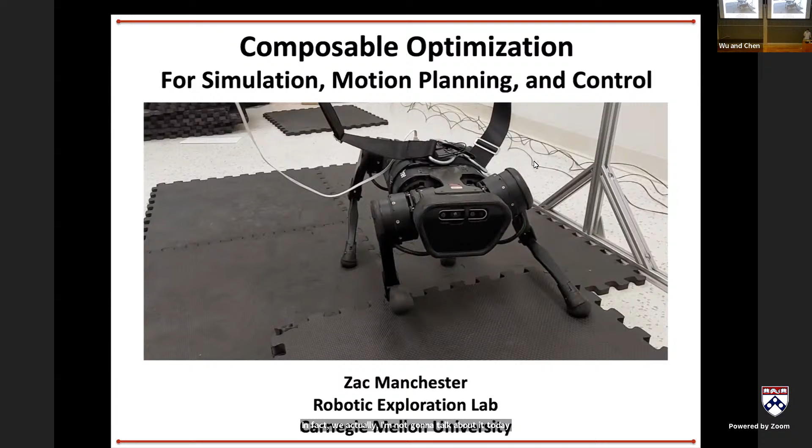As Michael mentioned, I have had a long-running interest in space things and still do. In fact, I'm not going to talk about it today, unfortunately, but we have 4 satellites on orbit from my lab right now doing kind of crazy multi-agent formation flying things. I'm happy to talk about that later if you want to, but just to bring it back, as a space nerd, this is one of my favorite robots, right?

This is Mars Curiosity. This thing is kind of incredible. It's been on the surface of Mars for 11 years now, which is wild, and still operating in one of the harshest environments imaginable. And in that time it has covered 31 kilometers, which sounds really impressive until you divide those two numbers and realize that's about 7.7 meters per day. So from here to the other side of this room maybe is about all the distance this thing covers in a single day. And the reason for this is actually that this thing is pretty much not autonomous.

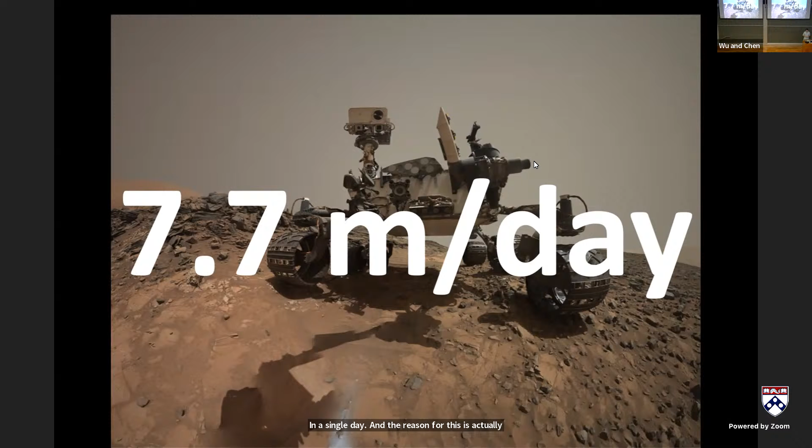There's some amount of autonomous driving these guys do, but for the most part, the way this thing is driven - does anyone know what this is? This is the famous Mars yard at JPL, where I've been lucky enough to visit a couple times. So what's going on here?

They have basically a mock-up of the rover in a big sandbox with a bunch of rocks and things around. To figure out how to drive this thing, there are human drivers that go in this giant sandbox and move the sand and rocks around to recreate the scene as best they can around the rover on Mars. Then they painstakingly plan and drive around these things to figure out how to drive in the given scenario on Mars, and basically uplink these commands, and the rover executes it. So it's a painstaking human-in-the-loop situation anytime they come across anything tricky. As a result, you're ultimately not able to cover as much ground, get as much science done, et cetera.

Meanwhile in robotics, we're all familiar with seeing really impressive feats on legged robots. But for me, this is still the bar, and we're still not quite here. What we'd love for these systems to do on Mars, say, is to operate with the level of agility and robustness as these guys are able to, on super rough terrain, reasoning about full body dynamics, rich contact interactions with the environment, all that kind of good stuff.

All right, so how are we going to do this? I guess this talk has three parts. It's a bit of my philosophy on this whole thing, so bear with me a bit.

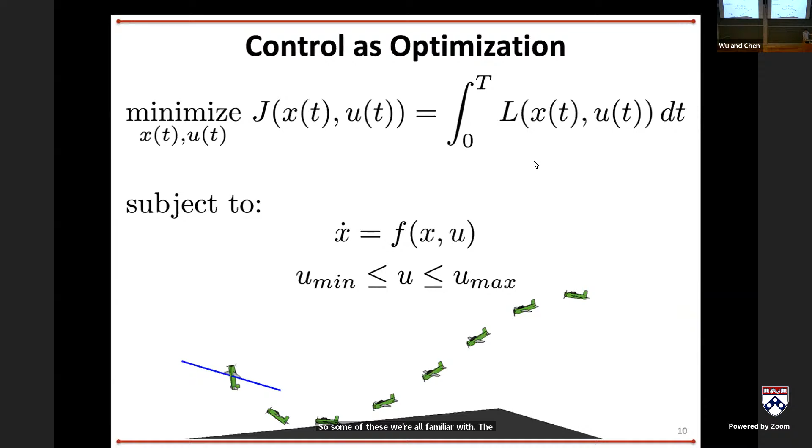So some of these we're all familiar with. The first one being control - optimal control, reinforcement learning. The gist of these things is maybe you have a model, maybe you don't if you're doing model-free RL, but you have some model of your robot, maybe with things like F equals ma and torque limits. You have some kind of objective function, cost function, reward function - depending on if you're a learning person or a control person - that you're trying to maximize or minimize, which encodes the behavior you want: minimize effort, get to some goal, minimize time, whatever that might be. Generally speaking, we can discretize this and throw it at a computer in a bunch of different ways and hopefully get an answer out.

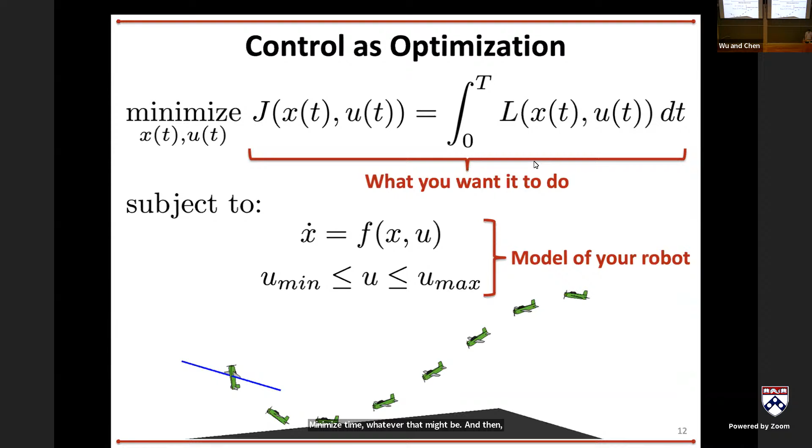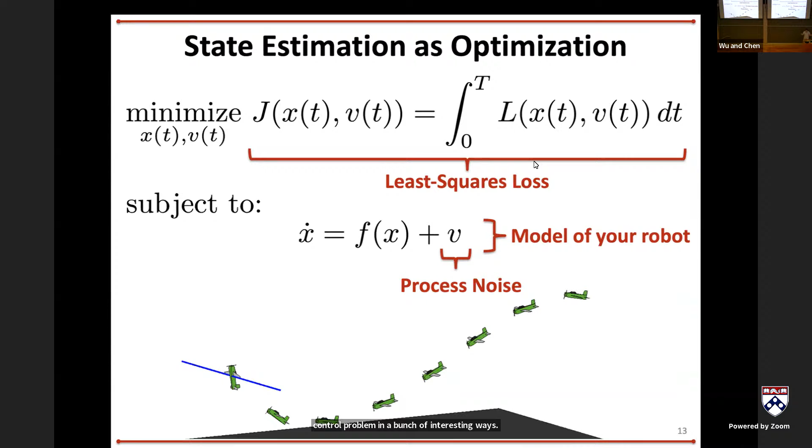Almost identically, we're probably all familiar with the fact that state estimation can be posed as an optimization problem. As a fun aside, it's actually equivalent to an optimal control problem in a bunch of interesting ways. Similar deal - we can solve this optimization problem and figure out where we are, given measurements and a model.

Maybe a little bit farther afield and less familiar to us in robotics is that you can also pose physics as optimization. This is the classic least action principle. Usually we encounter this somewhere in undergraduate physics, and it's usually this weird thing involving calculus of variations that we'd rather forget. Somewhere in there you end up with the Euler-Lagrange equations, and then life is good, and we kind of use some package to just give us the manipulator dynamics.

But I think there is actually a lot of value in going back up to this slightly more abstract optimization formulation. If you take this a little bit more seriously, there are some particularly useful properties for us in robotics here. Rather than doing the crazy calculus of variations and getting your Euler-Lagrange equations, instead look at this and try to directly minimize it. The L in there is the Lagrangian, and this is the posed trajectory, and you minimize this thing over time.

If you stare at this and think about it for a second, this looks exactly like that optimal control problem, just with some letters changed around. If you take that seriously and use the kind of methods we use to solve optimal control problems on a computer - namely, we just discretize this thing and minimize it explicitly as a numerical optimization problem - you can get physics this way too.

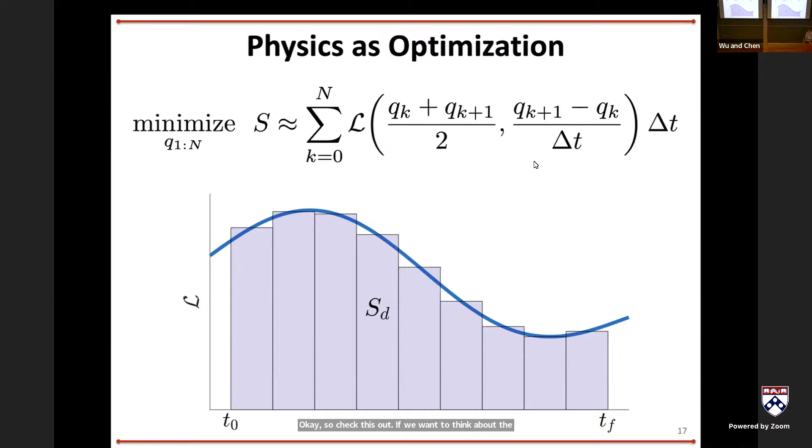Okay, so check this out. If we want to think about the environment now, the reason to do it this way is now I have this numerical optimization problem. I can throw inequality constraints in there, and it's no big deal. And we have great solver tools for doing this.

In particular, if I want to think about impacts, which historically are these nasty, non-differentiable, stiff things that are hard to simulate, well if I take this perspective, all I need to do is throw an inequality constraint on there that says, for example, the height of this brick has to be greater than or equal to 0. If I do this and take that discretized least action problem and just solve it with any solver you want, out pops impact dynamics for free. There's no kind of numerical badness. And it does the things you expect.

Basically, if I put that constraint in there with a Lagrange multiplier, the Lagrange multiplier ends up pretty much being the contact force, the impact force, normal force, whatever. And you can do a bunch of cool things with this. So maybe it's a good idea to go up a level and think about our physics in this kind of optimization way too.

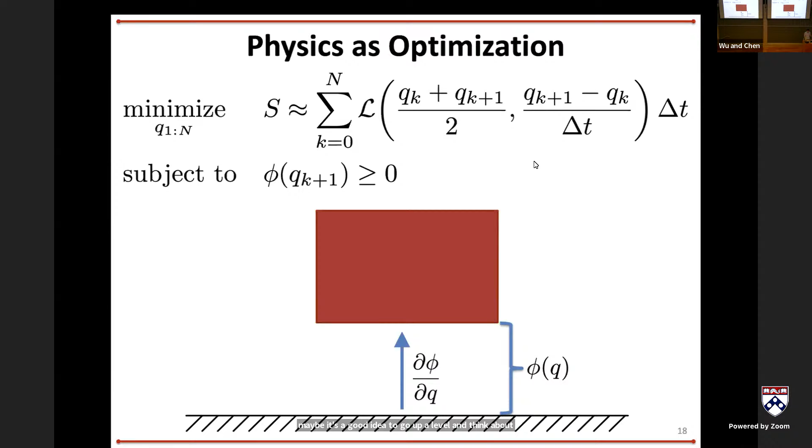So this is a nice optimization problem. We can solve this. We get all the stick-slip nastiness that tends to mess us up and gets approximated in all these simulators we're used to using. This just gives you the answer, and it's a convex optimization problem. So why is this so hard?

And the last one I'll talk about, which is actually recent-ish work out of our lab that I'm particularly proud of and I think is kind of cool: collision detection is also maybe a good idea to pose as an optimization problem.

So you can kind of wave your hands and imagine if I'm looking for the closest point between two convex objects, I can pose that, distance is a convex function, right? Some kind of norm. If they're convex shapes, I can write this down as a convex optimization problem to find the closest point and the distance between the two objects. There's some details in there I'm going to skip for now, but there's a paper on it. It's kind of cool, and yeah, we can do this as an optimization thing too.

So what we've kind of gotten to here is: we've got physics, we've got collision detection, we've got state estimation, and we've got control. All of these are optimization problems at some level. And kind of the key question now, which is part 2 of the talk, is how do we put these things together and assemble them?

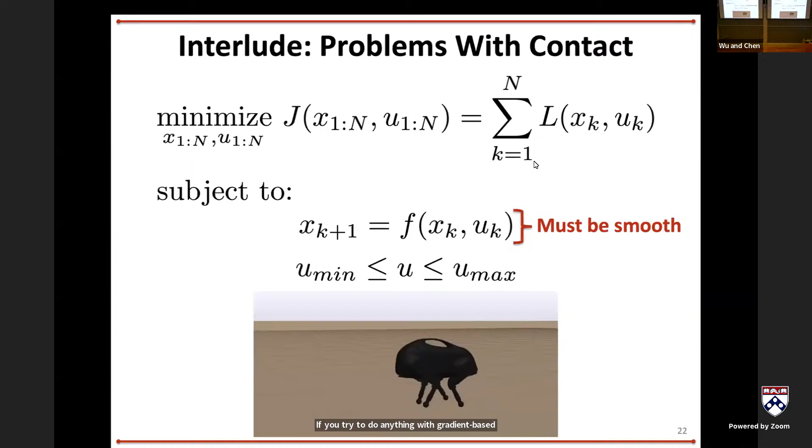These are all non-differentiable things. And you can try to approximate these in various ways, but you end up with generally bad numerical things happening due to this non-differentiability if you try to do anything with gradient-based optimization here, right? And so in particular, that dynamics function there for this robot, if you're not doing some sort of relaxation, whatever, is non-smooth, the gradients are kind of bad in various ways, and it makes doing gradient-based optimization really hard.

That said, right, we're all used to seeing robots do pretty impressive things. So how does this get done?

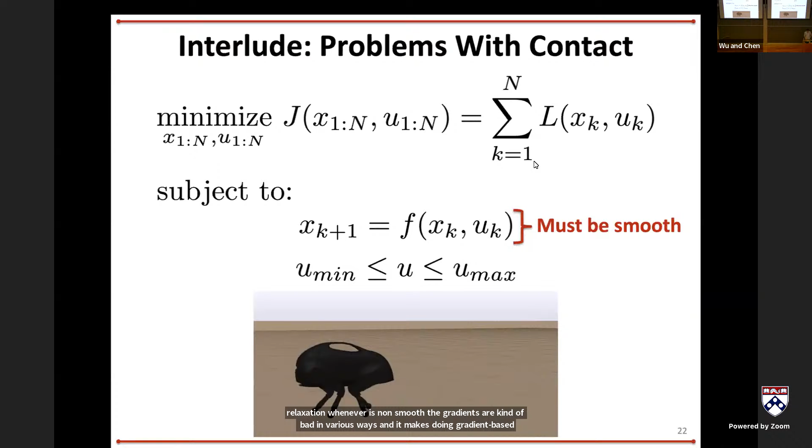Practically speaking, most of the robots out there today are doing some kind of hybrid approach. What this means is if you can look at this problem and pre-specify the contact, what's called the mode sequence. For example, for a legged robot, it's the ordering in which the feet touch down and lift off, basically the gait. If you can pre-specify when those mode switches are going to happen, you can essentially remove those nasty non-differentiable switching events from the optimization problem entirely. You pre-specify them, and then you're just optimizing over nice smooth arcs in between, and we're back to stuff we know how to deal with.

So this is pretty standard. You can use standard tooling. We can solve this in ways that are fast and accurate. The problem is we need this contact mode pre-specification.

In a lot of cases, you can do this reasonably, particularly in a lot of locomotion contexts where you can just pick a gait, especially for a biped - it's like left, right, left, right. There's not too much to do there. Even for a quadruped, there's a handful of gaits you might want to do, and there's lots of good heuristics for doing this. So you can get pretty far with this.

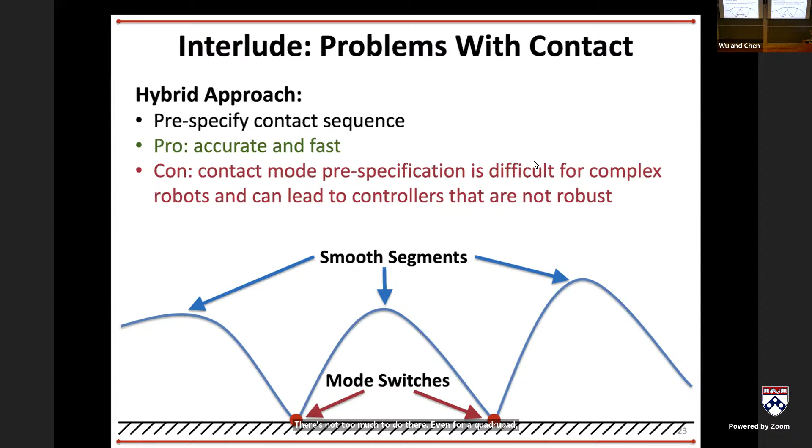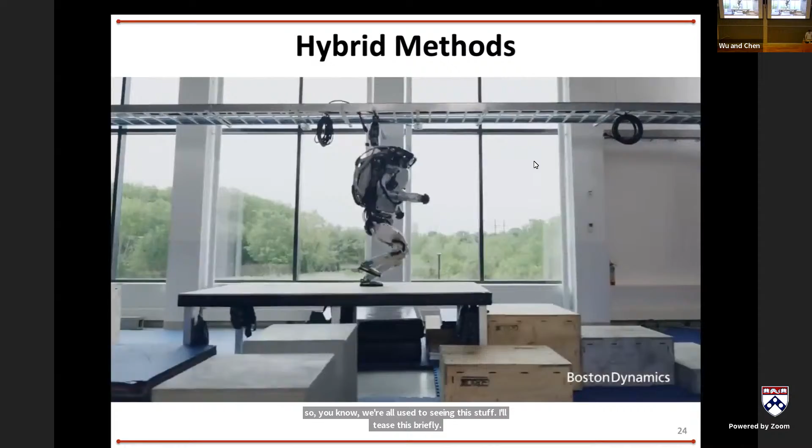And so we're all used to seeing this stuff. I'll tease this briefly - this is really impressive. This is all done with these hybrid ideas. But there's some issues, even in this context, with these ideas.

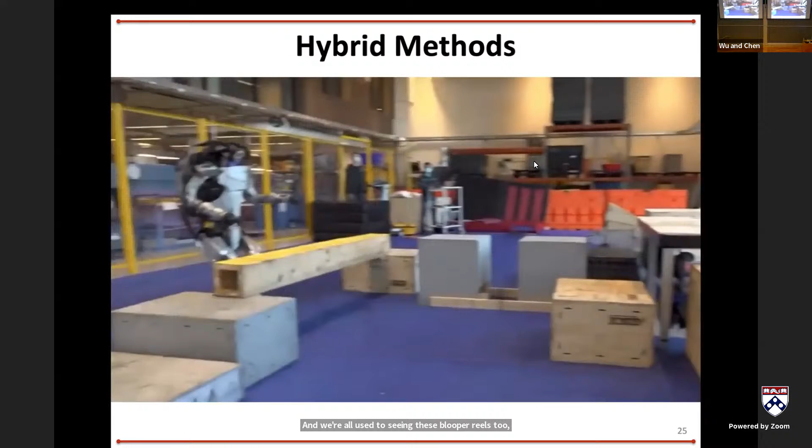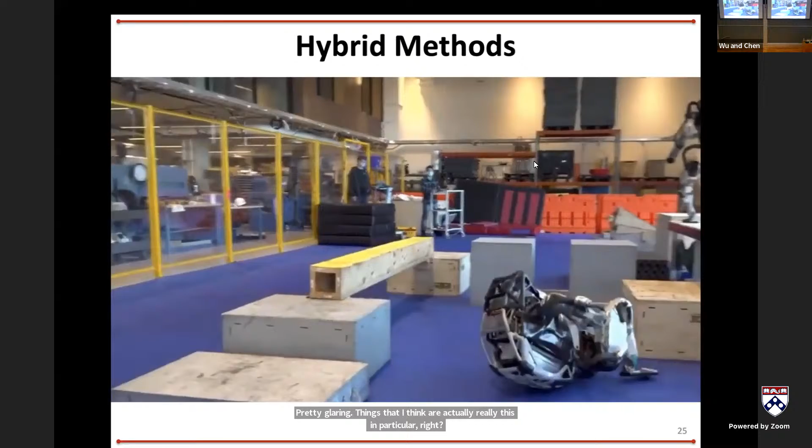And we're all used to seeing these blooper reels too, which, to their great credit, Boston Dynamics puts these things out. But if you look critically at these, there's some pretty glaring things, in particular right here. So what happened there? Basically, the robot's trying to jump over this beam, and it's making contact with its hand. But then in the middle of the maneuver, it grazes its foot and then fails.

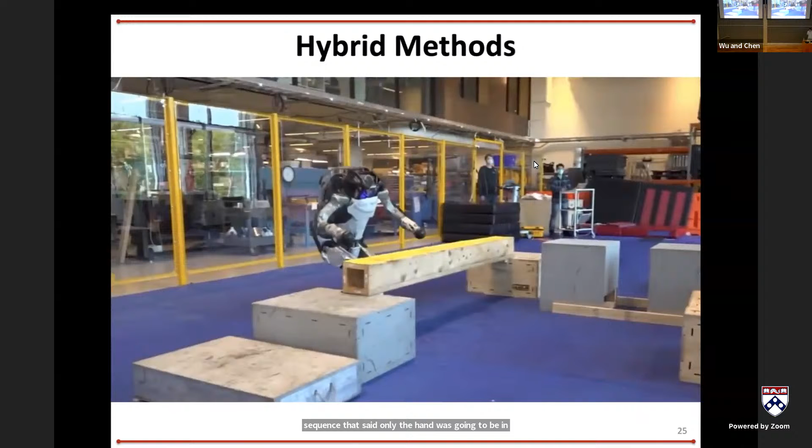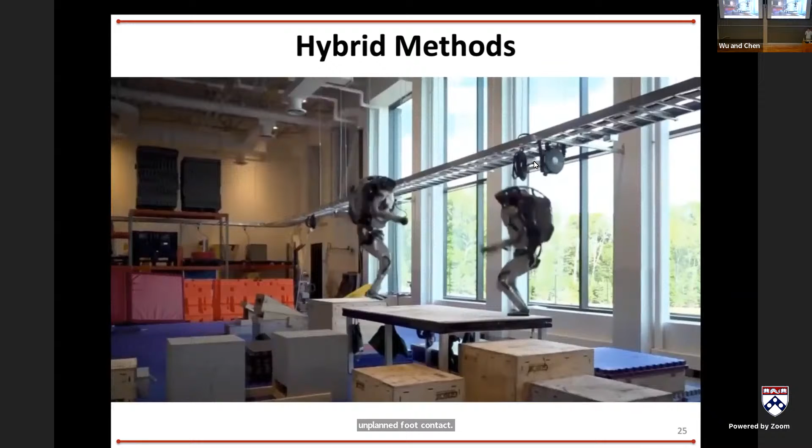And the reason it failed is that it was relying on this pre-specified contact mode sequence that said only the hand was going to be in contact with the environment. And the controller, as a result, didn't have any way of reasoning about the contact forces made by that unplanned foot contact. Said another way, the controller is essentially open loop on the contact modes - it cannot reason about unplanned contact switches.

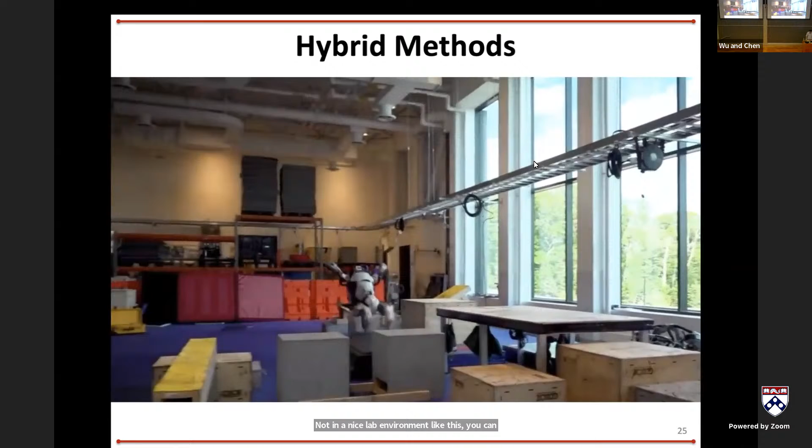And so this makes these things kind of, in some sense, inherently brittle. You can imagine putting these things out into the wild, not in a nice lab environment like this, and you can get into serious trouble. So there's this open loop nature to the contact modes that we'd like to try to make our controllers reason about more fully.

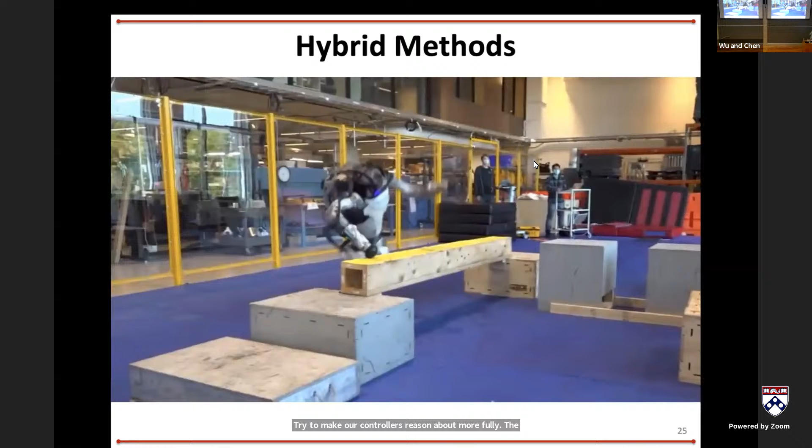The other scenario in which these things tend to break down is when you have lots and lots of possible contact modes that you have to reason over, which can happen pretty quickly in manipulation tasks where you might be doing in-hand manipulation, and you can't just talk about a handful of a finite number of contact points anymore. It's like a continuum. If you tried to discretize it, it'd be very high dimensional, and you'd end up with combinatorial badness trying to figure that out with a hybrid method.

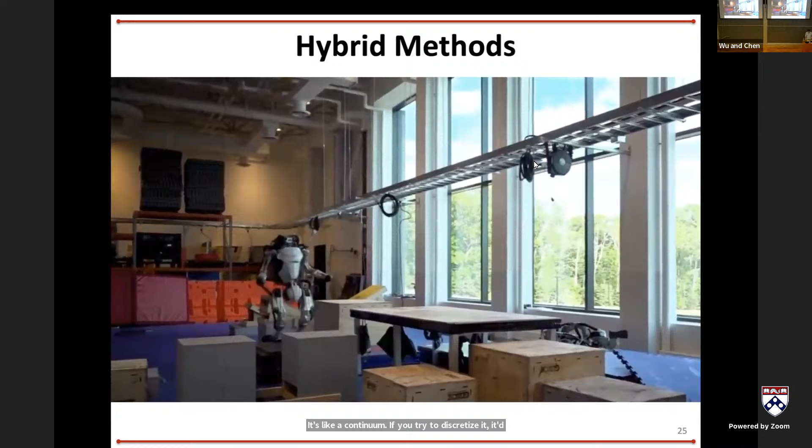So that's the hybrid story. What we're going to try to do is this second thing here - contact implicit is what this tends to be called. Michael here has done lots of this and kind of pioneered this in some ways as a PhD student. The idea here is what we really would like to do is optimize over not just the state and input trajectory of the robot, but also these contact forces, and let the algorithm fully reason about the ability for the robot to make and break contact with its environment and deal with unplanned contacts and actually plan these contacts itself.

So far, though, most of the methods that have tried to address this either make a ton of approximations, basically smoothing approximations for these contact physics to make the derivatives nice, or if they try to really deal with the true nature of these discontinuous stiff contact things, they tend to have serious numerical difficulties or combinatorial blow up in some way. Okay, so that's what we're after.

So what I'm going to do now is tell you how we're going to try to take all these pieces, which we, in principle, each have a nice optimization algorithm for, and stitch them all together in this kind of weird coupled diagram.

Yes, please. No, it's great.

Yeah, I think we can do it. There's nothing stopping you from doing it. I mean, there's the Rayleigh dissipation function, right? You can state friction in a variational way. It's sort of all optimization, right? So it comes down to this like...

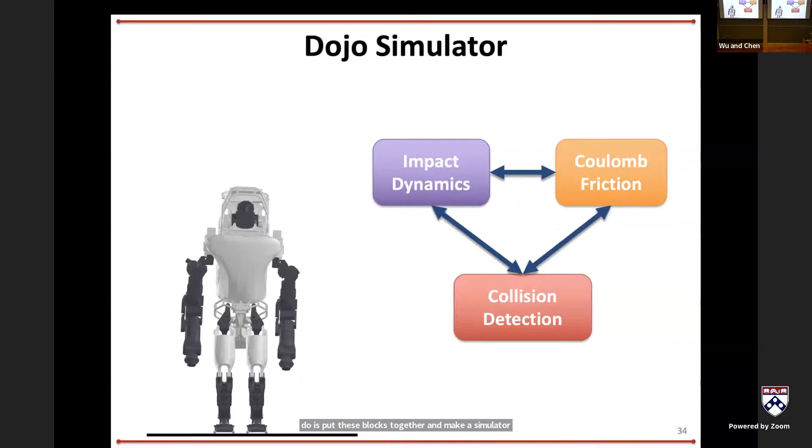The first is that you can do true hard contact simulation. If you're familiar with other simulators like MuJoCo, these often have weird artifacts - in particular, they have interpenetration, say, where the feet sink into the floor. They also have creep, which means because stick-slip is inherently non-smooth, if you do any kind of smoothing, you can't actually do sticking friction. So in MuJoCo or many of these other simulators, you always get creep - stuff slightly sliding downhill - and you can't get true static, sticking friction, which is annoying.

I mentioned briefly, and I'm not going to go into it, this kind of variational perspective where you're minimizing that action integral. These methods in conservative settings give you energy and momentum conservation basically to machine precision, which is very cool - they have these nice long-term stability properties. They obviously don't conserve energy in this impact friction setting because it's not conservative, but the point is they give you good long-term stability, which is really nice.

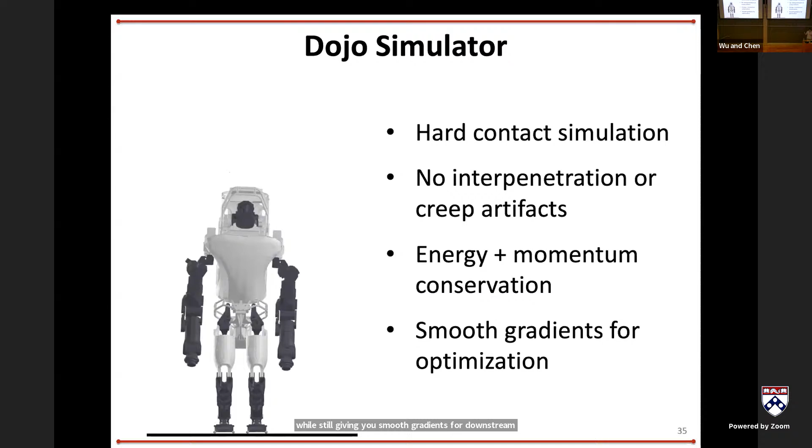And then finally, we can do all of this while still giving you smooth gradients for downstream optimization, which sounds weird, like getting your cake and eating it too. But there's a key trick we're playing. I mentioned this rho parameter, this central path parameter that's smoothing things out and lets us take gradients and lets us do Newton's method.

Yes, we are. So what I'm doing is basically caching the last 3 or 4 iterates of the interior point method. I'm giving you x from the final converged answer, but I'm giving you the derivative from one of the previous iterates that was smoothed out before I pushed rho all the way down and converged all the way. Does that make sense?

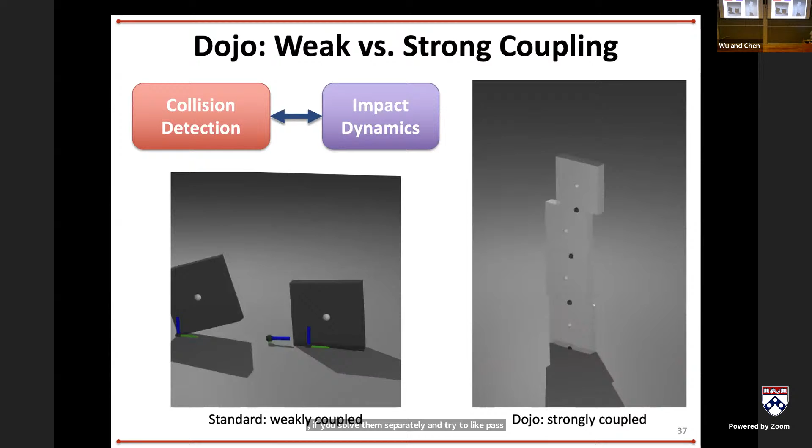The KKT conditions for this are some kind of variational inequality. You could also call this a mathematical program with complementarity constraints or equilibrium constraints, but I think that viewpoint does not result in good algorithms, because what you're trying to do there is think about it at the level of complementarity constraints, which are horrible things you don't want to deal with. I think the lesson of numerical optimization writ large is that every performant optimization algorithm finds some way of sidestepping complementarity. In interior point methods, you smooth it with a log barrier. In active set methods, you switch to avoid dealing with it. Basically every way we know to solve optimizations well is a trick for circumventing directly attacking complementarity. So pick your favorite way to do that.

Sorry, this got pretty off track. Let me try to get us back on track.

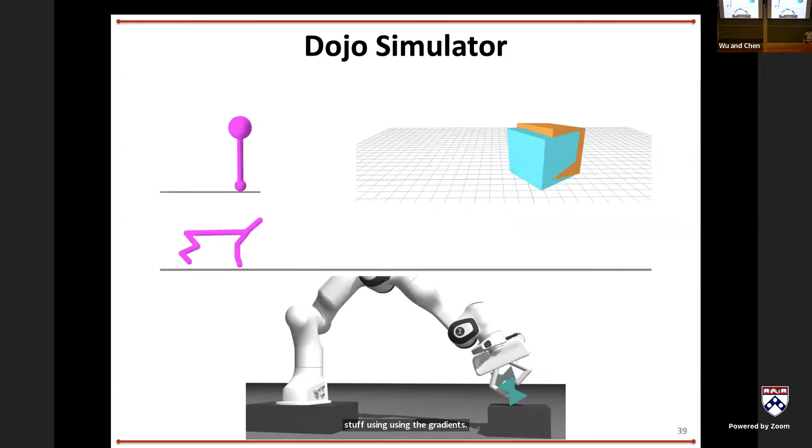To finish up here, what I really want to talk about is the stuff we've done in the lab, taking all that physics stuff and nesting it or combining it with the optimal control problem, doing the stuff shown in these videos. We went pretty deep on this. As you can imagine, these optimization problems are not easy to solve—the numerics are pretty gnarly. So we started asking what in this we could approximate while still maintaining the ability to reason about these contact interactions in a nice way.

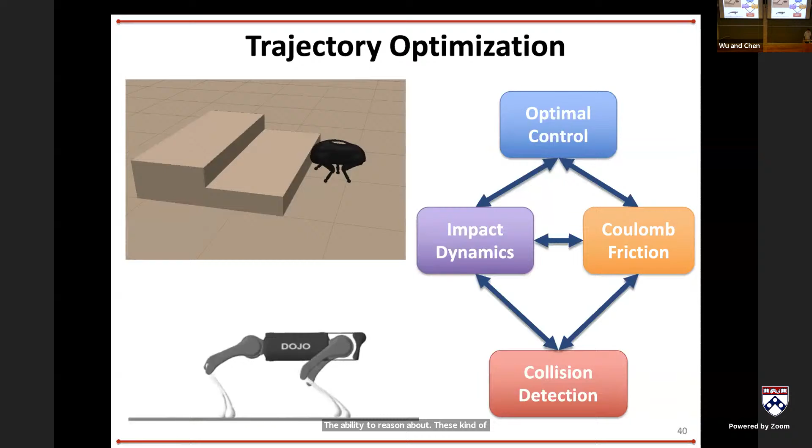So what we started doing is we want to keep the structure of this problem. We want to keep this block structure with this cross coupling, because this is what's giving us the ability to think about stick slip and impacts and all this other nice physics. So what we're going to do is keep the structure, but start approximating things in the boxes.

For this control problem, we take a reference and track it, so now we have a nice quadratic objective that's easy. Inside the dynamics, we linearize them locally about some nominal trajectory or nominal pose. We're not linearizing anything about the impact dynamics, just the manipulator dynamics. In the collision stuff, we can linearize the signed distance function about some reference pose. So we're not keeping the problem exact, but we're making the problems easier. Similarly, the friction cone we can approximate using a pyramid if you want, though that one's less critical. So you approximate stuff in the boxes, but keep the structure.

And then you can do cool things. So this is a fun little example we cooked up that we call PunchBot. It's an inverted pendulum with a little arm on top. The setup here is you linearize this thing about the upright, unstable inverted pendulum equilibrium. You linearize everything there, signed distance, manipulator dynamics, whatever.

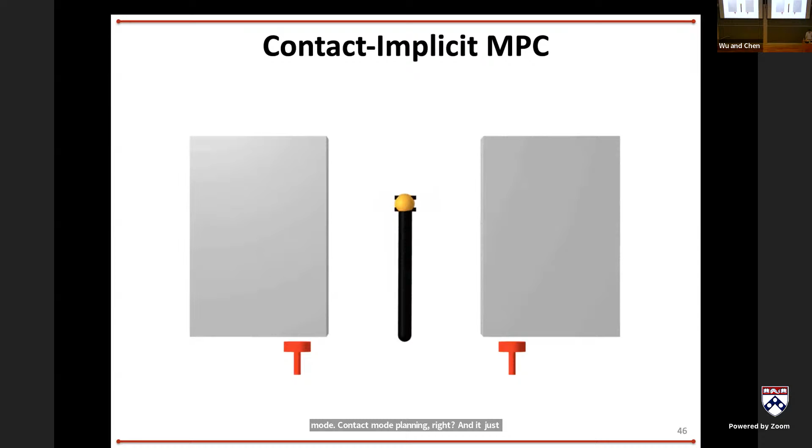And then you whack it. It has no information a priori about any kind of contact modes or anything like that, and it just figures out how to reach out to the left or right and push against the walls to balance itself. So it's doing this kind of contact mode planning very implicitly, and it just comes out of that optimization setup. We can solve this really fast because it's all linearized.

This is one of my favorite examples that I think really gets at the true power of this. To me, this was wild when we got this to work. This is a sort of very cartoony model of a quadruped that we call the point foot model. It's a single rigid body for the body, and then point masses for the feet. It's sort of easy to write down. We're basically abstracting away the leg kinematics to make the dynamics nicer.

What we did here was take this, have a nominal trotting gait, trotting in place at the origin, that we linearize about. So you have this linear time varying kind of thing, just trotting in place at the origin. That's all it has. It's linearized around that and just doing MPC on that. And then we just kick the crap out of it. It flies through the air and flails around and lands somewhere over there, and trots back to the origin. So it does effectively push recovery, figures out where to place the feet to not fall over, and then it's somewhere way over here, and it just nicely trots back to the origin. All we gave this was a linearized set of dynamics and contact signed distance function information for this trot at the origin thing, and it figured all that out in this emergent way.

For me, this was kind of the really impressive thing that initially doing this in sim made me believe in this, that we could really do some cool things.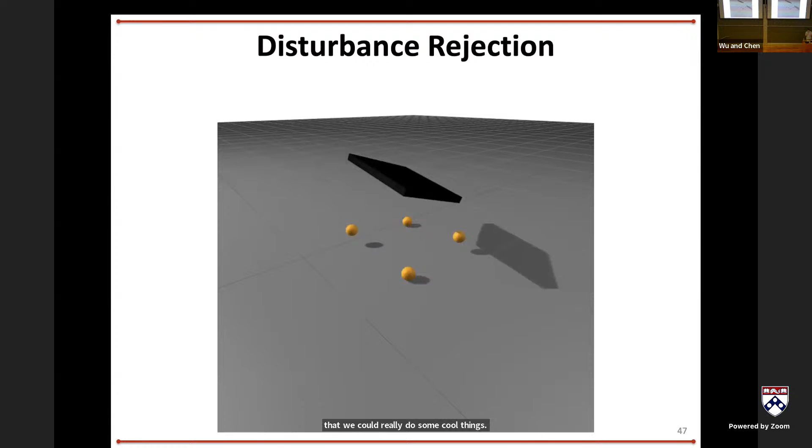Yes. Yeah. So that's coming next. Thank you.

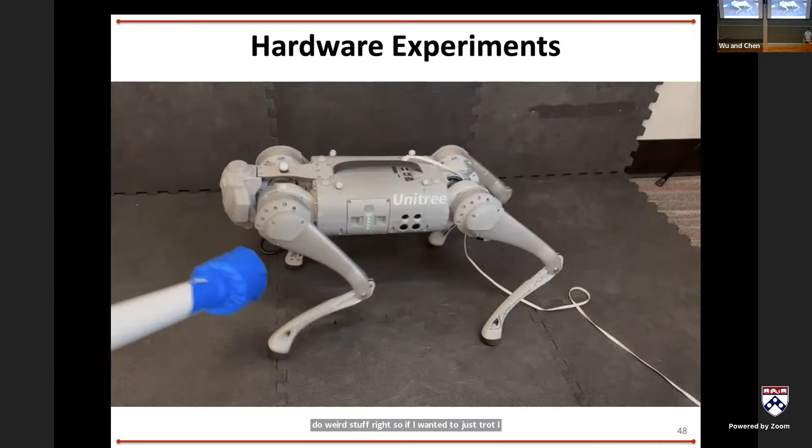So we've done this on hardware. This is now kind of a little outdated, and we're continuing to push this stuff. We're running the controller at around 100 hertz, which is not fast by modern, say QP, MIT Cheetah standards, and these demos are not particularly impressive by those standards either. But this lets you do weird stuff. If I wanted to just trot, I wouldn't do this, I'd pick your favorite variation on the Cheetah controller that's doing hybrid stuff with a gait. But we can do weird things like reason about arbitrary contacts with the body in arbitrary ways.

So we're using contacts with the head and other parts of the body, with the environment, in kind of interesting ways. I think this opens you up to... this is pretty preliminary stuff. We're actively working on some demos of this flavor that I don't want to give away because I think we're very close to getting them to work. They're going to be cool, I promise. But yeah, this gets you the ability to reason about arbitrary contacts, right?

And I can get this stuff without having to do a whole lot. I can linearize the signed distance function for this guy standing in the corner, and it can now know, oh, I can stick my head in the wall, I can do all this weird stuff, and it can kind of generate those.

So they're time varying linearizations in these tracking problems, but it's weird, calling them linearizations is a bit funky, and I sense the discomfort with this, and I agree. It's not, though, a piecewise hybrid thing. What I'm doing is keeping this weird optimization problem structure, this block structure with all these cross-coupled optimization problems, and say, rather than that least action problem being a nonlinear, nasty optimization problem, I make it a very benign QP, for instance. So I'm taking all those subproblems that might have been harder.

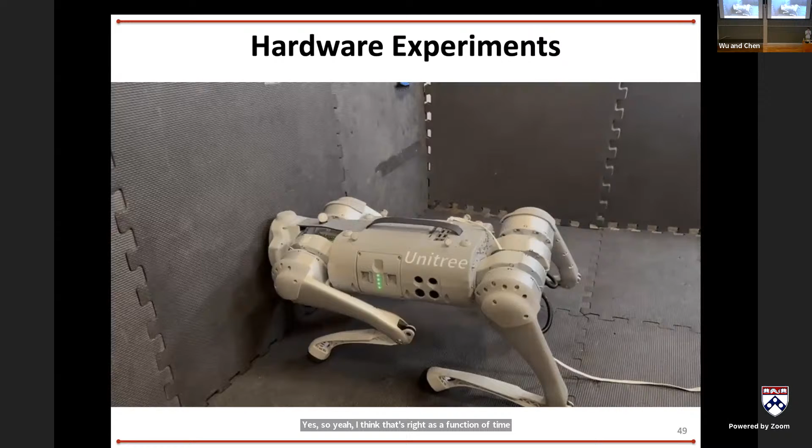Yes, I think that's right. As a function of time, there are definitely discontinuities in these things. I think that is a completely fair characterization. But I'm not doing mode enumeration, though—I want to make that clear. There are complementarity things in the KKT conditions of all those subproblems, and we're keeping that in there and solving those problems.

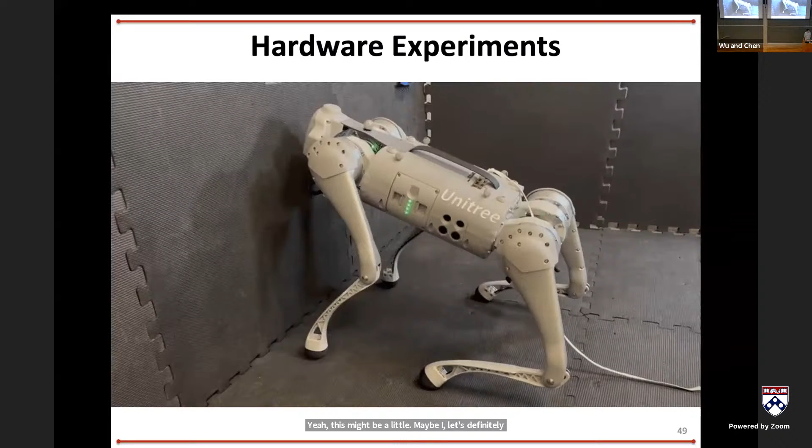Yeah, this might be a little... let's definitely follow up on this, though. Yeah, I'm happy to do that. Maybe I should wrap up, right? We're getting close. Okay, so let's wrap it up.

So part 3, what else can we do with this stuff? I alluded to the game theory thing—we've actually done some of that. We have a couple papers doing weird game theoretic MPC for autonomous driving that basically uses these ideas and sets up multi-agent non-cooperative games to reason about other drivers, for weird highway merging examples.

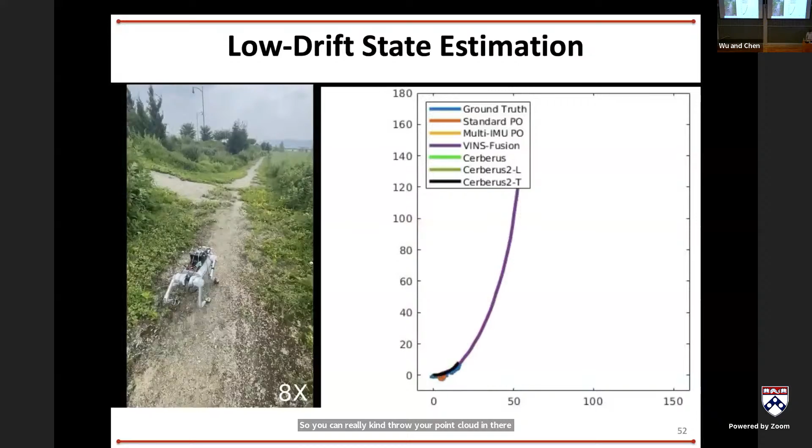We've done a bunch of state estimation stuff too that's kind of fun and leverages some of these ideas, which I won't have time to talk about, but I'm happy to discuss offline.

One of the big things we've been focused on lately is that these problems are big and kind of hard to solve, and it took frankly pretty heroic effort on the part of a few of my PhD students to get the numerics to work well enough and fast enough to solve these things in real time. So we're really interested in ways of solving these problems faster as we scale up.

One of those efforts recently was designing a QP solver that's GPU native. And when I say GPU native, I don't mean embarrassingly parallel, solving lots of tiny problems in parallel, but solving, say, the Atlas problem with very high dimensional states. How do I actually do that in a way that exploits parallelism? This is a really hard problem that's still open. We don't really know how to parallelize large optimization problems for things like this.

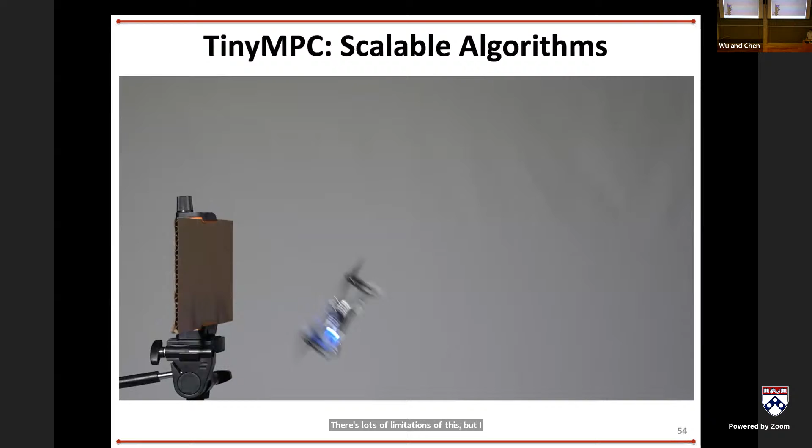I'm also interested in scaling things down. We do a lot of tiny things, especially in my other aerospace interests. Another recent paper I'm pretty into, maybe a little orthogonal to most of the talk, but I want to tease it: we did this paper called TinyMPC, where we played a lot of tricks and got an MPC solver to run on a tiny microcontroller, so we can run it on things like this Crazyflie drone on a little STM32.

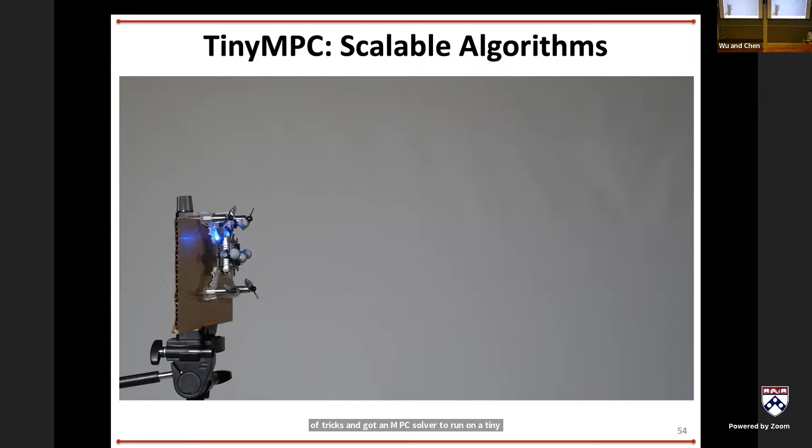To finish up, going back to this whole context story, we talk about the sim to real gap all the time, and people are into ideas around transfer learning and stuff. But for me, what would make a lot of sense and be really interesting, maybe a bit underexplored right now, is: I might do all this stuff and go run on the hardware. Why am I not taking all the data from the hardware and pulling it back into the simulator and doing essentially sysid?

But I think we can do this in a pretty general way where we use function approximation in targeted places in the simulator stack. Maybe Coulomb friction's a kind of coarse approximation. Maybe I can learn something there, fit something from data to get a better friction model, actuator models, compliant behavior.

All these things that are hard to model, right? I think there are principled ways of targeted function approximation inside the simulation stack, where you take real data on your robot and fold it back in and make the simulator better, so that next time you have to do a lot less transfer learning and you can reduce the sim to real gap. And again, this is possible with the stuff we've got because we can take all these gradients.

I think a really inspiring body of work recently has been these impressive drone racing demonstrations, and a big part of that was exactly this. They would do a bunch of offline stuff with models, put it on the hardware, take that data, fold it back in to improve the models, like residual learning, and go back and forth a few times. I'd say they could do that in the drone context because everything's smooth. But in something like legged robots, I think we haven't quite been able to do this in a lot of these nastier friction and impact cases because of the non-differentiability. But maybe we can do it with this stuff.

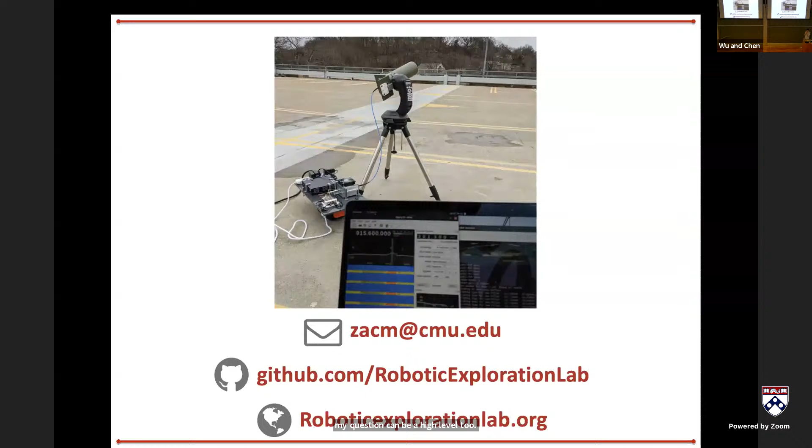Well, yeah, so I guess my question can be high level too. So when you have the real-to-sim, are you trying to, would you plan to use a neural network or the physics model to learn the gap? If you use the physics model, then there could be something fundamentally wrong about the functional form instead of the parameters. So I guess what I'm arguing for here is structured learning.

It's the idea that, like, I know Coulomb friction is bad. So if I wanted to do this, but in particular, if I want to be data efficient about it, because that's kind of the main point here, these experiments are expensive and hard, and also the models are good enough for a lot of things, but there are areas where maybe the models are bad, and I can know that. I can do these experiments and look at the residuals in different places and say, hey, my friction model is really bad. That's the worst part.

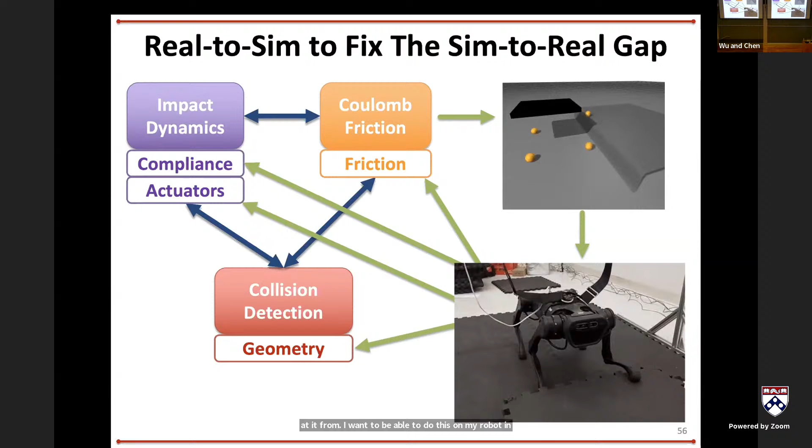So maybe it's worth it for me to put a single small function approximator in there in that one spot, which will be a small thing with a few parameters that'll be easy to regress with a handful of experiments with limited data, as opposed to learning some big giant residual function on the whole dynamics that's super expensive. So philosophically, that's kind of where I'm coming at it from. I want to be able to do this on my robot in the lab in 10 minutes. Once I've got something close, I want to dial these things in a little better based on experience, without having to relearn everything or have some giant thing that requires large amounts of data.

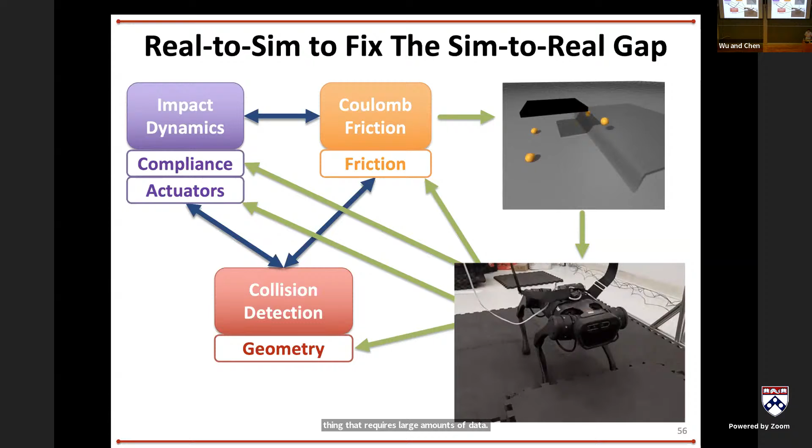You showed the Stanford bunny thing. Can you talk more about that work? Yeah, where'd it go? What are the differences between the results you showed on the two sides? Oh yeah, sorry, I really glossed over this.

So what's going on here, maybe we can play it again. This was very preliminary stuff, we've since done more on this. If you naively model this as point contact, you get the thing on the left. There's all kinds of situations where these grippers will grip and you'll get one point over here and one point over here, and there's no patch contact stuff there or torsional friction, so it does this weird rocking thing, and that's kind of unphysical, right?

So what's really going on there is there's small deformation, and you're getting patch contact effects. We're trying to capture that, which is the thing on the right. So we made some stuff up here. It turns out this is known stuff in the manipulation community from a long time ago called the soft finger model. It's basically trying to get at small deformation, nearly rigid. But essentially what you do is stick with the point contact thing, but endow the points with torsional friction, and that's what's on the right. So what we were showing here is that you could generalize the models we've got to this torsional friction, soft contact model thing.

I think following on this, there's some argument in the community that maybe everything in the world essentially is not totally rigid, right? Oh yeah, totally. And so your work is trying to deal with rigid and stiff and all these non-differentiable things. Yeah, everything is kind of soft. I have a take on this also.

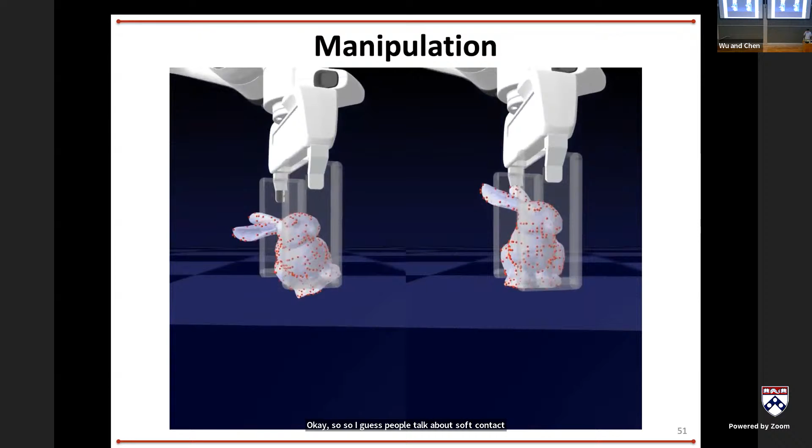So I guess people talk about soft contact models, especially the MuJoCo people have talked a lot about this, and there's a disconnect there. When we say soft contact model, it means something actually quite different from what you're talking about. It does not mean deformation. What's happening in these soft contact models, like in MuJoCo, is you're getting force at a distance away from contact, weird unphysical force field kind of behaviors, which is not a deformable object thing, right? That's a very different thing. So I think it's almost like a subtle lie we've been fed with this lingo, it's a little sketchy. Soft contact does not equal deformable object, it's much weirder and it's genuinely unphysical.

Yeah, I think what I'm asking is, because you're basically doing point contact, and you also mentioned patch contact, I think now there are some similar efforts trying to do patch contact. Do you think this will be naturally incorporated in your framework? Yeah, you can absolutely do it. This is kind of a first pass at getting patch contacts, this soft finger model, and yeah, you can do it.

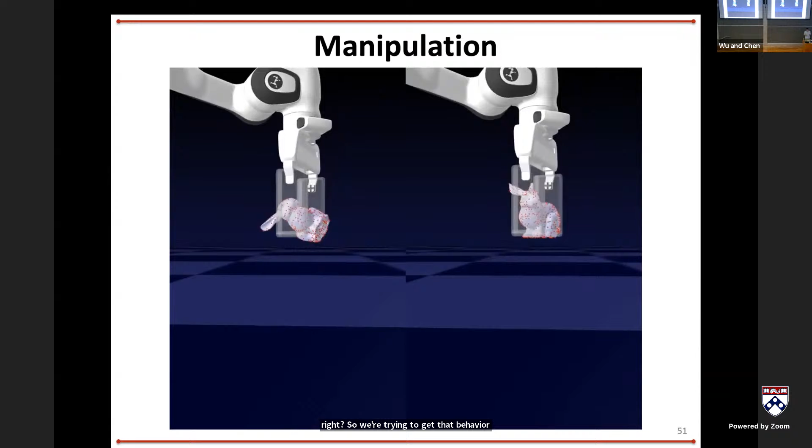More broadly, what I was trying to get at with that soft contact thing is that what people call soft contact models are absolutely not first order versions of deformable stuff. You still fundamentally have this switch behavior of I'm touching it or I'm not, and you don't have action at a distance, force at a distance. So we're trying to get that behavior. And if you have deformation, my argument is rather than have this smooth contact model where you tune some fudge factors to get squishy stuff, the right thing to do is keep this touching-or-not flavor, and then model the deformation explicitly in some way.

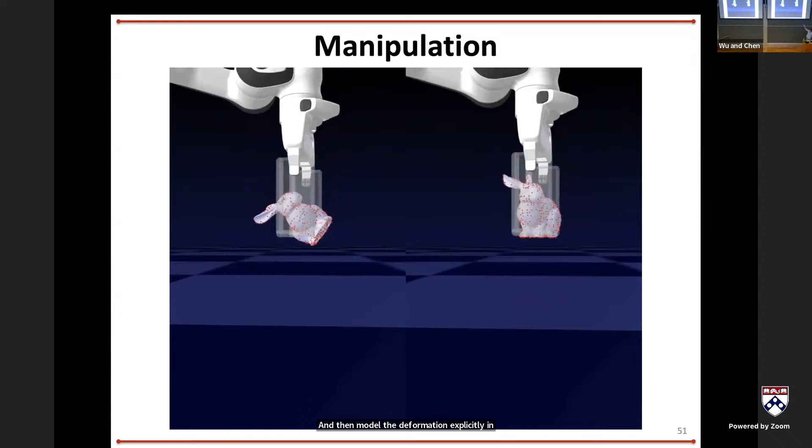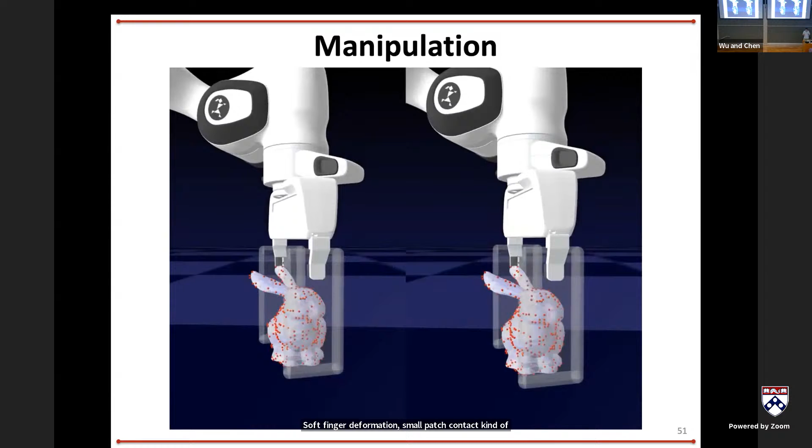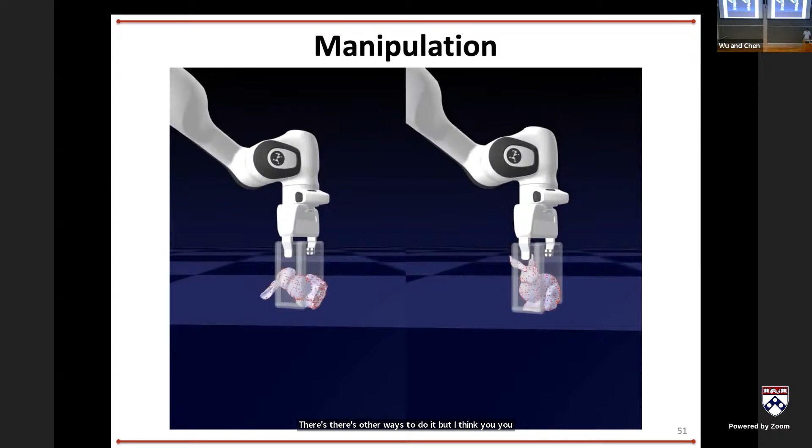So this is a very dumb way of getting at a first order soft finger deformation, small patch contact kind of thing. There's lots of other ways to do it. I think for instance the hydroelastic stuff in Drake is a really good, principled approach to this that I like a lot. There's other ways to do it, but I think you should take a physics-first approach and say, okay, there's deformation, how can I model deformation?

All right, I think it's probably about that time.

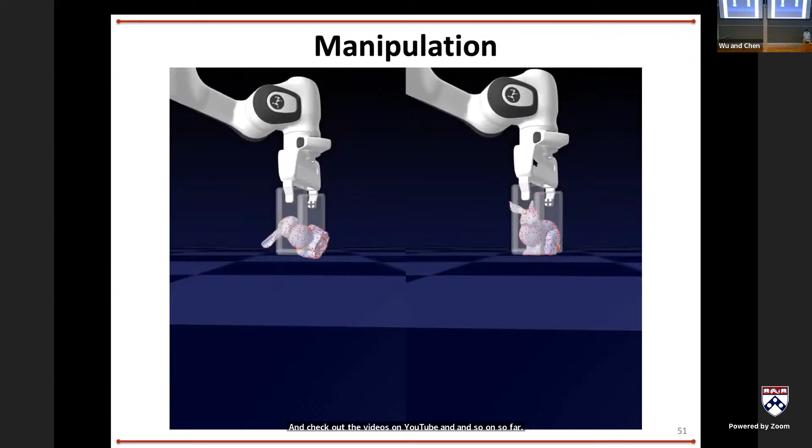All right. Thanks, man. I mean, you're kind of the home crowd.